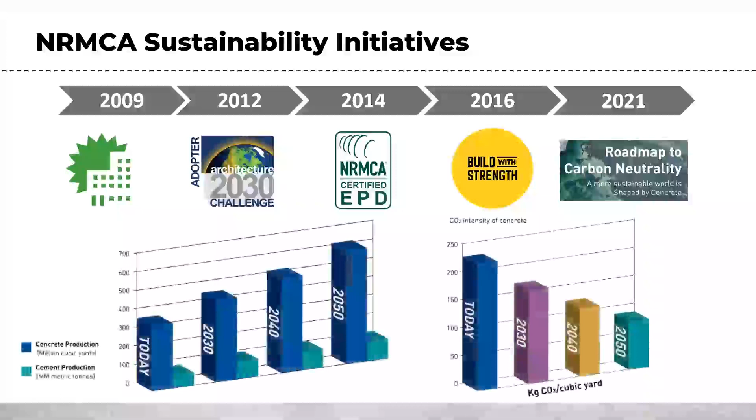And from that report, this is a good visual to identify concrete production in terms of volume and the anticipated projected volumes over time. So where we are today, it's interesting to note that the mass migration of people into city centers and metros, and just the need for constant building -- the best plan is always going to be to reuse, repurpose, that type of thing. But inadvertently, we're ultimately always going to be building new things, and concrete volume is projected to increase.

Same with cement production, but we're hoping to reduce the carbon intensity of concrete over time. So that's that right graphic you see there, today versus 2030, 2040, and 2050, and so on and so forth. All that put together, with our LCA report, from 2014 to 2021, we did record a measurable decrease in embodied carbon for our industry of about 21%. And we're about to launch the next iteration of that report here in the coming year.

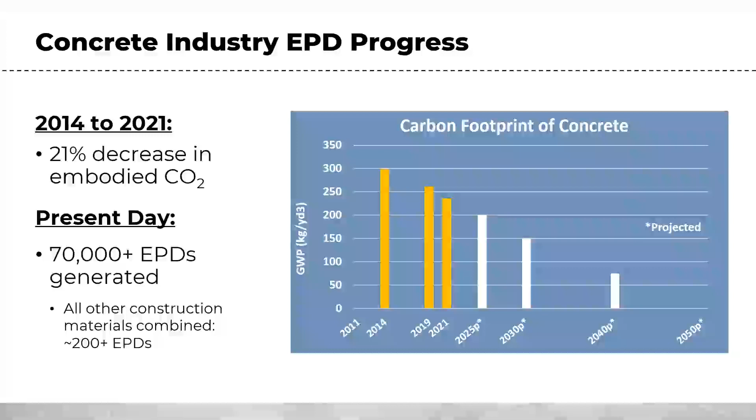So we'll see that even drop further. Present day, our industry has well over 70,000 EPDs generated - environmental product declarations for concrete specifically. Other materials have a much smaller quantity there. So we've been really making a name for ourselves in that regard.

The benchmark reports, this is just some background information. You may have experience with this. If so, great. If not, you'll definitely be crossing paths with it in the near future. We publish a report, we take in producer data, and we look at what a typical concrete mix looks like in certain regions, and then we also proportion industry-wide EPDs.

So our most current version, the 2021 version 3, has something like 72 industry-wide EPDs, based on different cementitious combinations. But version 4 is coming out here in 2024, and we'll have more industry-wide EPDs, so a broader spectrum of options there.

It will also have more specific regions. We went from in 2021, I think it was 8 regions, to a more spread out, parsed data into smaller regions and even possibly metro-focused regional reports. So this is for your benchmarking and understanding, hey, what are we comparing against for our actual project? So be on the lookout for that as it comes out.

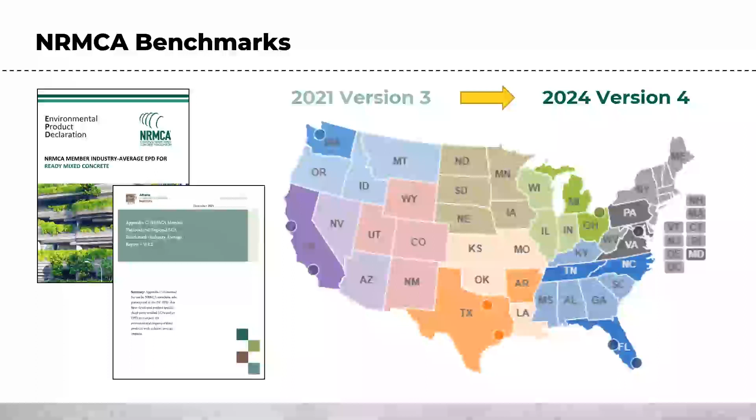Lastly, just some resources here. Check out our website, we'll have all these documents. Top 10 ways to reduce concrete's carbon footprint is a great strategy presentation and educational guide. We have our guide spec as well that highlights the transition to a performance-based specification. These are all going to help you on this journey.

And really, the last thing I want to highlight before handing it off to Luke is just a quick touch point on an important piece of information for setting the stage. Where does the carbon come from when we talk about concrete? Concrete is an agglomeration of many different materials and ingredients, right? It's like a cake - there's not just flour, there's water, there's sugar, there's all types of things. And with concrete, it's just the same.

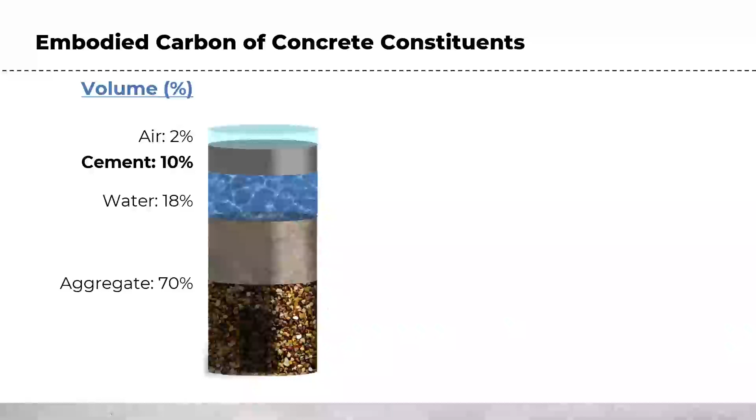And here on the left, you see a breakdown of volume in terms of aggregates making 70%, water and cement only 10%. But when you look at the actual carbon impact of each individual ingredient - and this is for a standard roughly 4,000 PSI mix with no SCMs - you see that cement, although being 10% of the volume, is around 80 to 90% of the actual carbon impact. So that's just a good important piece of information to highlight where we're dividing and focusing our efforts, and something our presenters here will also touch on.

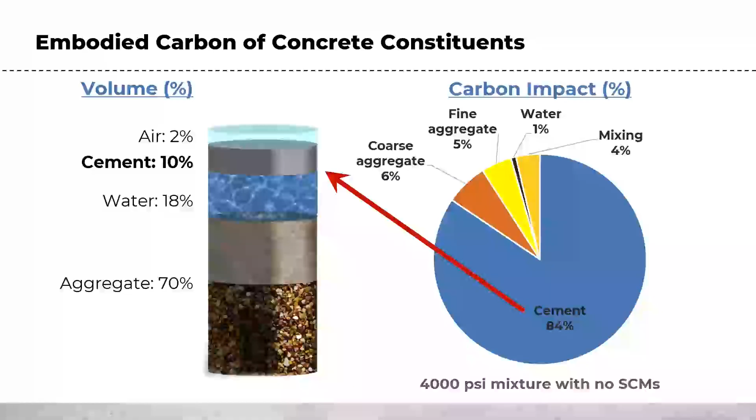So I'll hand it off to you, Luke, and we'll contribute from there. Great, thanks so much, Brandon. Yeah, super excited to be here with Brandon and Dave to talk about a topic that's near and dear to my heart, low carbon concrete.

Yeah, so my name's Luke Lombardi. My background is in structural engineering, and I'm now a sustainability consultant with Buro Happold, and I sit in Los Angeles. And I'm going to start here just talking about why are we here, sharing my experience of what is motivating people.

And personally, I got into this through SE 2050, a program that is engaging structural engineers to own their role in global greenhouse gas emissions. And I'm sure many on this call are familiar with other similar programs, like AIA 2030. Even mechanical engineers have their own decade now, and there's been a ton of great momentum around embodied carbon. Through this, we're starting to see more and more companies also form commitments like science-based targets initiatives. As more people track and measure embodied carbon, or even just scope 3, or the purchased goods carbon, it's becoming more and more apparent just how important a role it plays in industry decarbonization.

And another major driver - I'm sure people are starting to feel maybe a little bit of the heat or pressure to pick up this topic - is all around policy, right? There have been a number of buy clean policies that have come into effect in recent years at the state level. If you want to learn more about that, Carbon Leadership Forum has a great map that you can track those. And shout out to Dave, who's been doing a bunch of really great advocacy work in the Pacific Northwest, as well as we're starting to see both local and state level whole building LCA requirements. Thinking about it, Vancouver and Toronto have both passed requirements for whole building LCA.

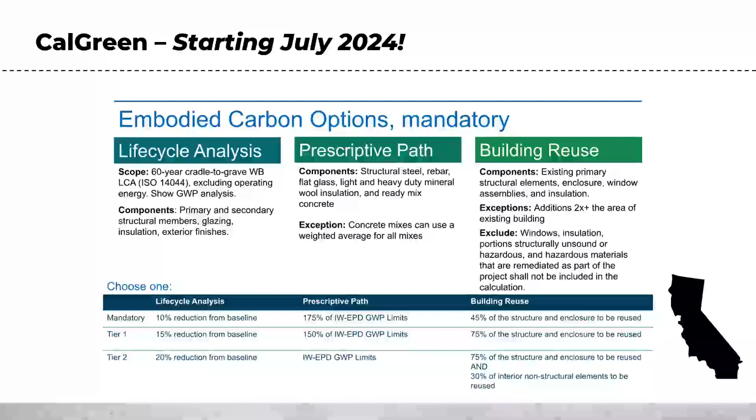But before I go any further, if there's one thing I want you to take away from this webinar, it's that this topic is all about collaboration. It can be very overwhelming. There's a ton of rabbit holes we could go down, and like Brandon said, this could be an all-day workshop, but you are not alone in this. One of the empowering things is really just being able to have the curiosity and humility to ask questions.

I don't have to know everything about mixes, like set time for concrete or pumpability, because I have people like Dave who you can reach out to. So it's very much a team effort, and I know there's going to be a ton of information today. Hope you can go back to this for reference, but I really want to empower everyone to use this as a launching pad to have more conversations, and not be overwhelmed by what can feel like a large new topic.

So diving right into it, people may have a wide range of experience doing LCA, but at the highest level it's relatively simple. We're tracking our material quantities, and it's very important to have tight, good numbers. All of this is contingent on having good data, and that's one reason it's really important to engage folks like structural engineers when thinking about structural embodied carbon, to get building quantity materials, and then we're just multiplying by what Brandon was talking about with the EPDs, like the global warming potential factor.

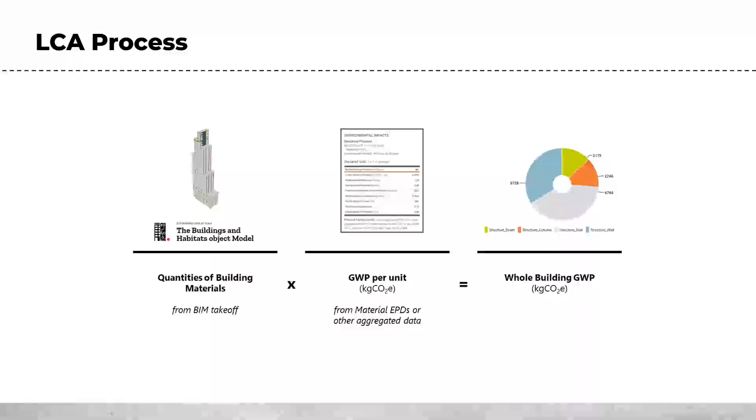So if we have a cubic yard of concrete, that's going to have on average a certain intensity from the manufacturing process primarily, but also transportation, where that aggregate's coming from, where the energy is coming from. All of these things distill down into one number, which is a GWP number. And then we take in aggregate all of those materials for the building, and that's how we get our life cycle assessment.

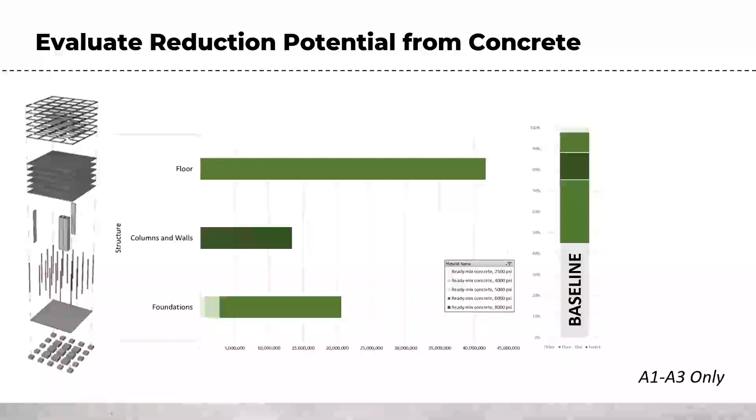But if we know the proportion of the overall contribution, then we can have some sense of what percentages we're playing with, right? So if we can reduce 10% of something that is 50% of the project, we have a 5% overall reduction, right? And that's important when we're thinking about our overall goals.

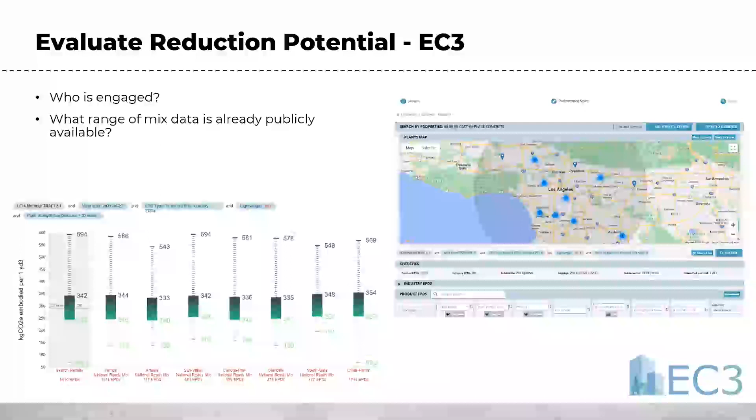And as we get this baseline set up, I think it's really important to start that collaboration process, right? I'm going to keep reinforcing that, but there are a lot of free, easily accessible tools at our disposal now. EC3, something I use pretty much every single day. There's a very nifty new feature that just came out, I think recently, where you can develop a project, and now when you search, you can set a radius within your project and even see the different manufacturers, ready-mix suppliers in the region, and see what data is available to make those informed decisions.

So going back to the project example, we can look at our floor or we can look at our foundation. We can search by that strength, and we can also lay out some other design criteria. Very important, I will also say that this all comes with some asterisks, right? The data that is available in EC3 may be somewhat skewed based on maybe some optimism bias.

It doesn't search by application. So if I search for 5,000 PSI concrete, it doesn't separate mixes that have been applied for floors or foundations or even sidewalks, right? But it can give me a sense of what is the range of impact that I can expect given mixes that are even specific to my region and my regional ready mix suppliers.

And I should also take one step back and just say that baseline, looping back to Brandon's initial comment, that baseline is set by those NRMCA industry averages. So what is a typical strength that I'm using for my project? Very excited for the next iteration of that, Brandon, and more regionally specific averages.

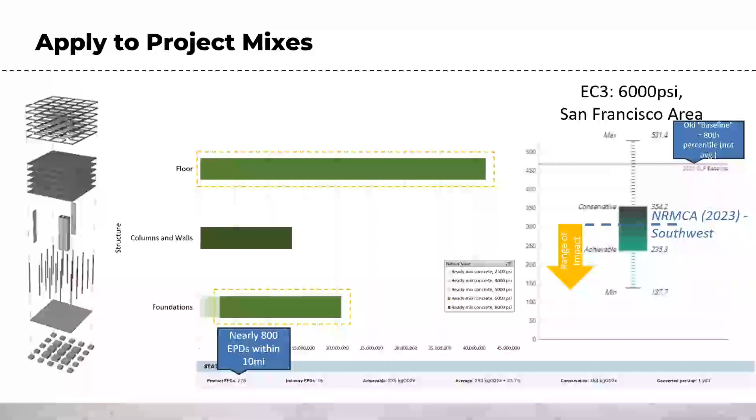But in our case, this is where we start the conversation. And we're particularly lucky here in California, but also places like New York, very rich in EPD and lots of data. It sort of depends where you are regionally, but EC3 is a great tool to just understand what ready-mix suppliers are already providing EPDs. Not that you shouldn't engage and try and get more ready-mix suppliers, or ready-mix suppliers whose EPDs are not on EC3, but it tells you which parties you can start to have that conversation with.

And as the design progresses, you can start to apply this to your goals of the project too, right? Like, are we trying to meet CalGreen or are we trying to meet LEED? A 10% reduction is sort of something that's been somewhat standardized by LEED, for better or for worse. But we can look at where can we have the biggest influence. And you'll see something that's common is floors are almost always the biggest proportion of our material, right?

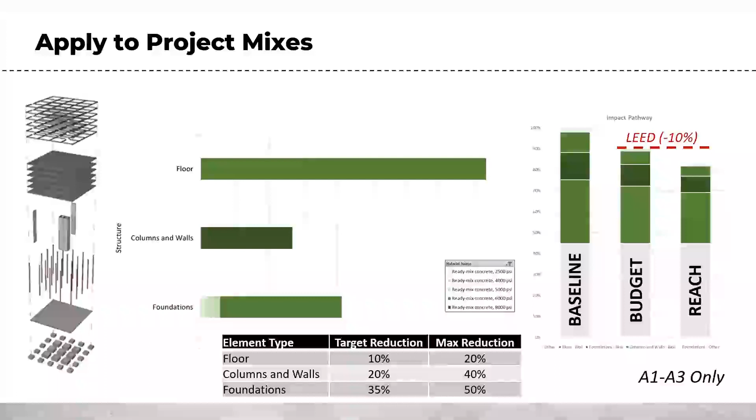And so that's something where we can really try to dial in both the design, but also see what we can do in mix design, because that's the biggest portion. However, there may be places where we can ramp up greater GWP reduction because of other design and construction considerations, right? Like a foundation might be a place where we can expect more reduction because there aren't the same schedule requirements or finishing requirements. The design strength isn't going to see the design load for much longer. Things like that, where we can have this conversation as a design team to see how we can optimize.

And that's the key piece, right? One of the biggest things, the first question I ask when I get pulled onto a project is, is there a general contractor engaged? And I try to start that conversation because they're the ones that probably have the biggest influence, right? Like they're the ones purchasing, they have the connections with the supply chain.

I try to write a little introductory email and talk about the goals of the client, goals of the project, and set up design charrettes, and just get an understanding of what ready-mix suppliers are in the area.

If I can have a conversation with mix suppliers specifically, we can talk about what is your SCM supply chain, what is the availability, is it seasonal, do you get Portland limestone cement. So the checklist of things we know can reduce embodied carbon in concrete, we can talk through those and make an assessment of what are the risks and what contingencies we need to meet our sustainability goals. Do we need a different mix design in the winter because it's cold?

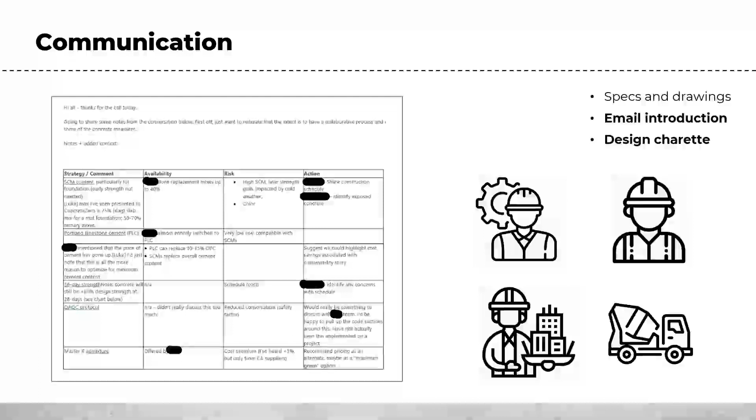Can we talk about loosening up a traditional 28-day break strength for certain elements? And where we formalize this - ideally you have a conversation and you can solidify some of this in your project documents, your specifications, your drawings, and there will be more discussion around performance-based specs in the rest of the presentation. This is where hopefully that communication gets solidified and becomes part of the requirements of the project.

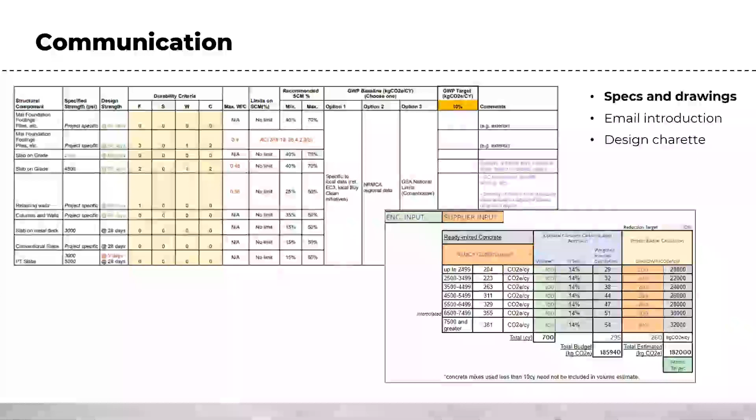Again, Brandon and Dave will talk more around the concrete GWP budget approach and all that, but just to say this is something that's key for effectiveness on the project.

And all of this discussion, all this collaboration, is really steering the industry towards better practice. It's how can we as structural engineers specify what we need and not restrict the design, for better optimization of global warming potential or other characteristics that are important. And I think there's a lot of mutually beneficial aspects of this.

Something we've been working on transitioning here in California is just getting structural engineers to make sure they write in their specs that they can allow Portland limestone cement. There's good data and a shift in the industry with that. And I think there will only be more innovations and other aspects that we will need to continue to collaborate on, and move faster, because the timeline we need to make changes for climate is relatively short.

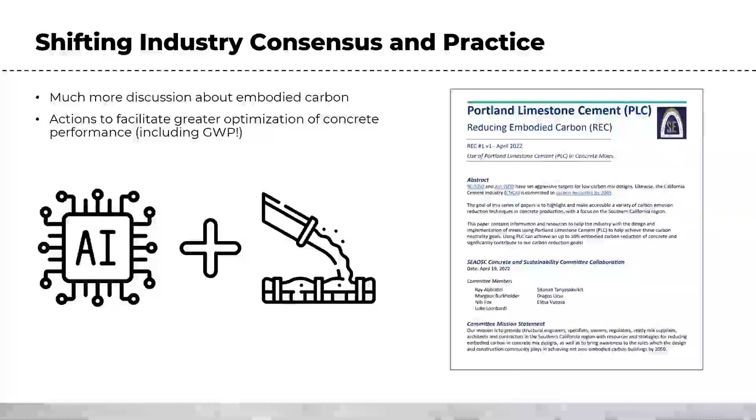I'm probably over my time. Like I said, we have a lot to cover, but just in closing, I want to touch on, because it's always something that comes up, cost.

There is industry research as well as anecdotal experience, and again I encourage you all to talk to folks who are in the field actually doing this. But there seems to be great potential, in the range of 15 to 30% reduction in concrete, possible without necessarily impacting cost or schedule or those things. And I'm sure Dave can talk more about that.

I also flag that right now there's a lot of industry research and it continues to be dynamic. Things will continue to change, but I expect we'll have to meet those baselines - might change in the future. It may change from the building itself, which is fairly common practice now, to more standardized intensity limits, and we can imagine that will continue to get more and more stringent as the decade moves on.

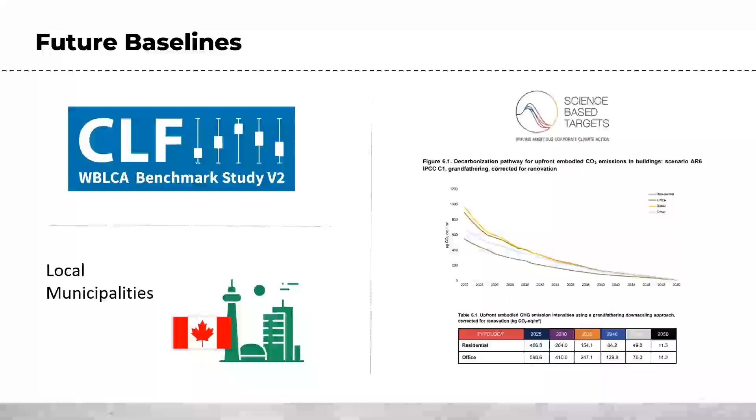Dave, I'll hand it off to you. That was fast.

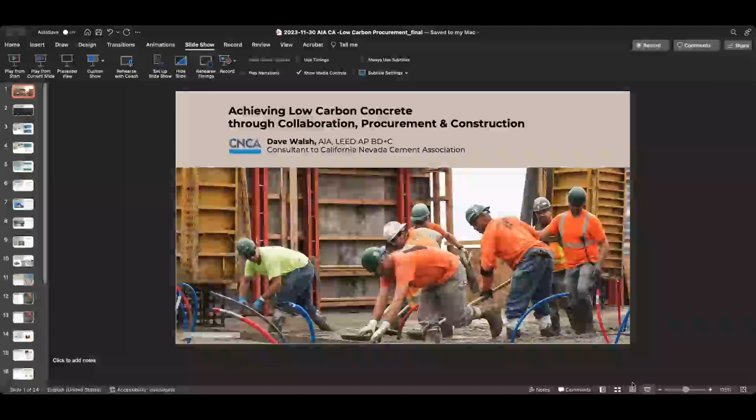All right, so again, glad to be here. Luke, thank you for that presentation. My name is Dave Walsh. I'm an architect and worked many years in the design field, and then most recently was the Director of Sustainability at Sellen Construction in Seattle, where I'm based.

So today I'm going to talk a bit about how contractors and design teams can collaborate, a little bit about procurement, but also what can be done before and during construction to reach the carbon reduction goals on projects. So I'm going to start with those very early decisions in a project that can put projects on the pathway to maximize their carbon reductions, but also have an impact on constructability.

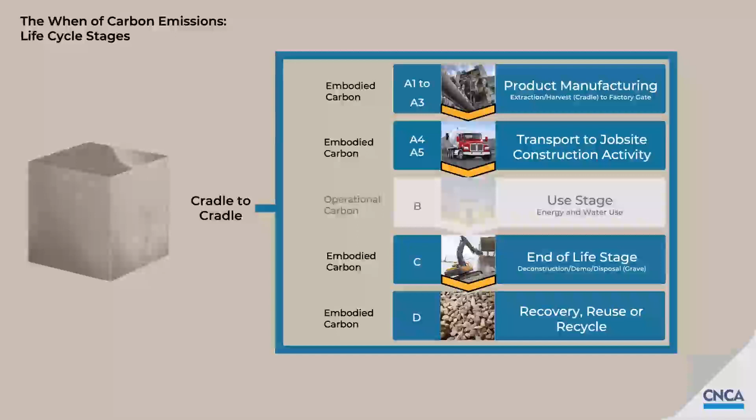So starting with the when of carbon, as many folks probably know, the International Standards Organization has divided lifetime carbon into various life cycle phases, A through D. This is the so-called cradle to cradle. A lot of the focus and conversation is around upfront carbon, so that's life cycle A.

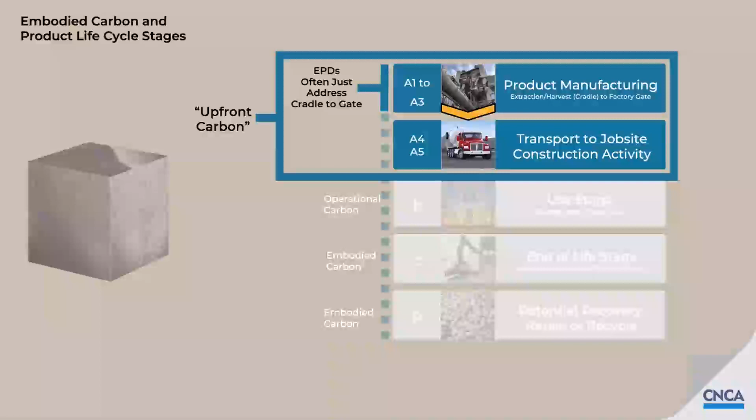And within that, a lot of the focus is on EPDs, which not always, but most frequently cover just A1 to A3, which is the so-called cradle to the factory gate. So you might think that, since today we're talking about concrete as a material and embodied carbon, that A1 to A3 is really all the story. But I would say that even before anything is manufactured or brought to the job site or placed in a building, there are very important design decisions which have a lifetime impact on carbon.

So I'm thinking about things like those program decisions—what is the owner asking in terms of flexibility requirements? And how does the need for flexibility drive things like the bay sizing, which drives span lengths, and all of that rolls up into material quantities and embodied carbon.

Obviously, your engineering choices matter: what kind of structural system, how is the lateral system organized, are there efficient load paths within the building or a lot of transfer slabs? All of those things too can have significant impacts on embodied carbon.

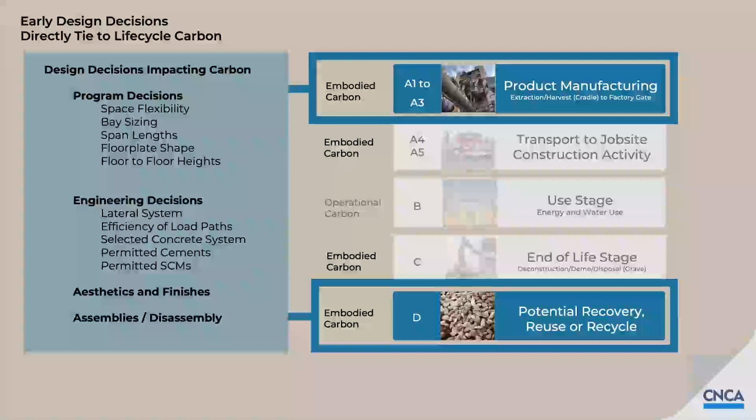And then towards the end of the project, how things go together, but more importantly, how things come apart in the end, ties directly to that last life cycle phase D. Because if things don't really come apart in a financially feasible way, they're really not going to be recovered, reused, and recycled to reduce the embodied carbon of that next project.

So once you've decided that concrete is the best fit for a given project, the next decision is what kind of concrete system—whether flat slab, slab on metal deck, or maybe a post-tension system. Each one of those systems has a direct carbon and constructability impact.

Each different system will have differing relative quantities of materials, and with that, differing relative quantities of embodied carbon. Your contractor might be thinking, with a given system, can I do a strategic trade-off?

Can I intentionally use a higher strength concrete, which may have more global warming potential lower down in the building, so that as I rise up, say with the columns, I can go to a leaner mix and have an overall reduction in embodied carbon.

Your contractor will also be focused on those tricky areas—where does, say, rebar congestion necessitate a highly flowable concrete like self-consolidating concrete, which has both a carbon and price premium over conventional concrete? And then, as always, constructability issues.

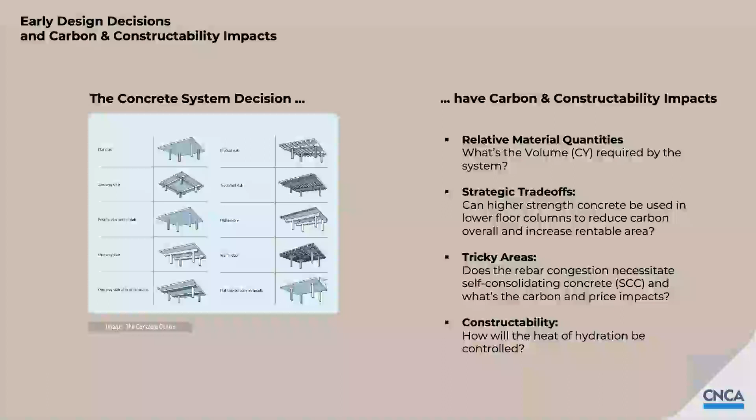Your contractor will be focused on things like the heat of hydration and how the various concrete systems affect that constructability need.

So the type of concrete system—some systems are more schedule sensitive than others. And I'm thinking in particular about post-tension decks. Those have a very tight schedule need.

They have a need to have a tight pour cycle so that it will support the overall critical path of the project. And so when you have to support the pour cycle, you need to reach an initial strength fairly quickly, sometimes between 1 and 3 days, to support that overall schedule.

And so your contractor is wondering, what is that—I'll call it the Goldilocks mix—the mix that meets that initial strength so you can stress your tendons, but doesn't have excess carbon emissions.

Also, your contractor might be thinking about the other elements in your project, the other applications, maybe a mat slab or a foundation that will receive the live load later on, and maybe the maturity date to reach that full design strength can be extended beyond the traditional 28 days.

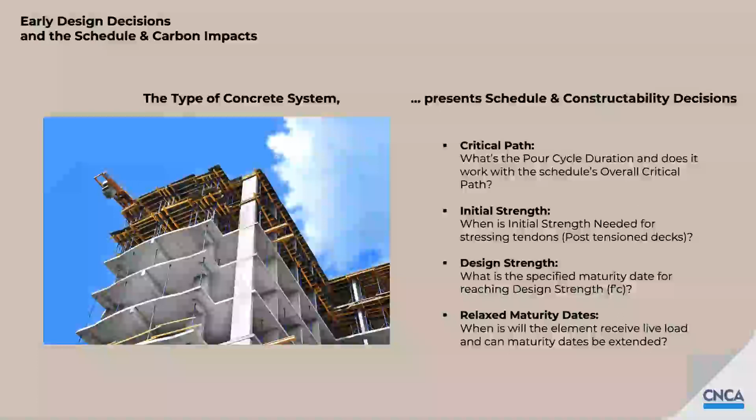So column layout, span, and lateral systems all contribute to embodied carbon. I think that some of these decisions are obviously not discretionary decisions. Sometimes your site is what it is, or your program demands those long spans.

But what I would suggest is that if you do have a project that has some flexibility in maybe the aspect ratio of your floor plate, or the spans don't always need to be those long spans, these are great opportunities to have material savings, and with that, have a design impact on reducing the embodied carbon.

So things that you might not immediately associate with greenhouse gases, like aesthetic decisions, can play a role. The desire to have a light appearing concrete, or the desire to have polished concrete, can influence your mix choice.

For example, if you wanted a light appearing concrete, is your contractor going to have to source white cement from perhaps the other side of North America and incur those transportation emissions? Or would it be acceptable to use a supplementary cementitious material like slag that has the advantage of having a whiter appearing concrete after it's cured?

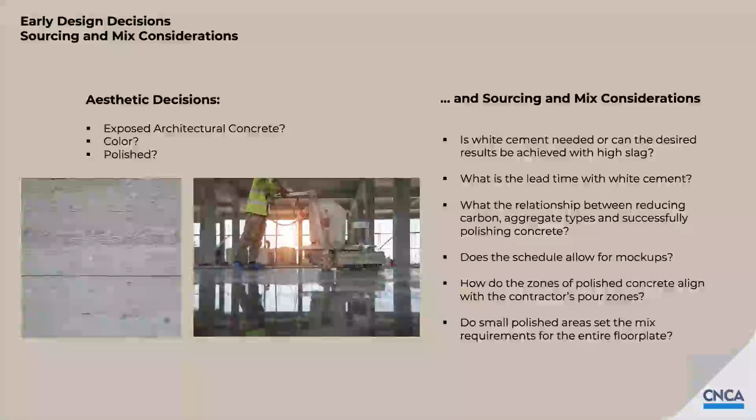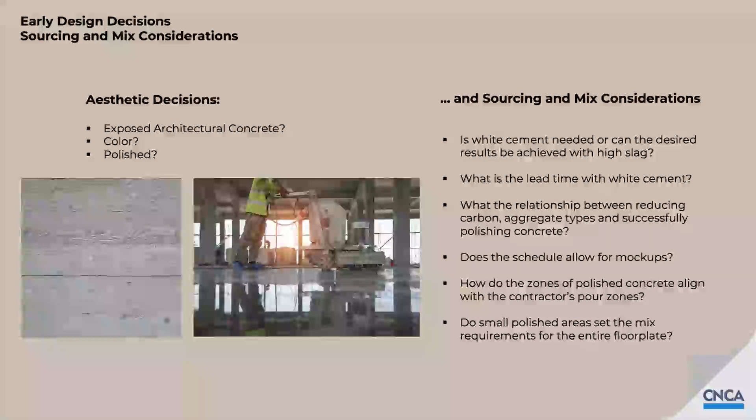So what can be in the specifications that enable your contractor the tools to reduce embodied carbon? When I think about specifications, I think that they really need to do basically three things. First, they need to be performance-oriented and not prescriptive.

So tell me what you want, not the recipe on how to get there. This is very important for design teams, because if you're overly specific, if you frankly give exactly the recipe, how much cement, how much this, how much that, and something doesn't work out, your contractor might say, hey, we did exactly what you told us and it didn't work out.

And maybe that's not our issue. The second thing that specs need to do is they need to allow for multiple options with the ingredients. So multiple types of blended cements, multiple types of supplementary cementitious materials, multiple options with both aggregates and admixtures.

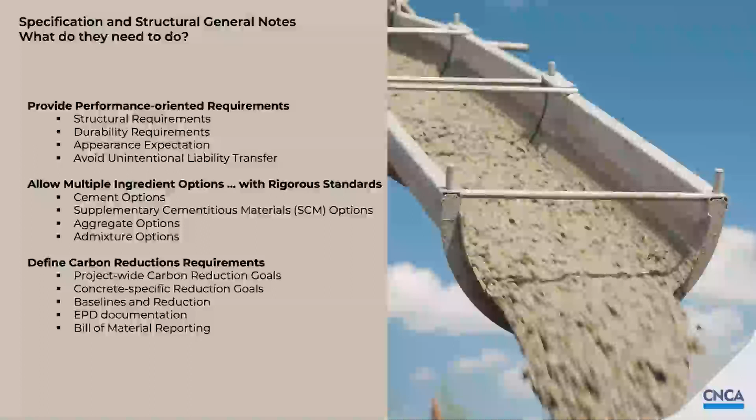And then lastly, the specs need to be very clear about what are the carbon reduction requirements, not just generally maximize reductions as much as possible, but very specific and quantifiable. Be clear that do you meet these reduction goals with a portfolio of multiple materials over the entire project, or is it something specific to concrete? And then when you set your reduction goals, be clear about what kind of baseline you're looking for, what kind of documentation in terms of EPDs or bill of material reporting.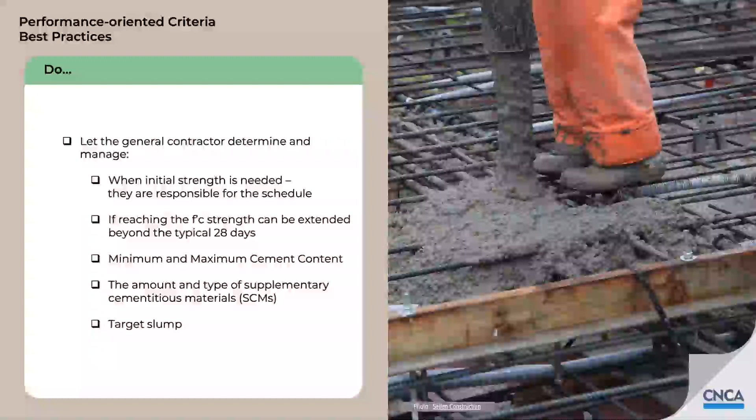So a few do's in terms of performance-oriented criteria. There's some things that you should let your general contractor determine and manage. They are responsible for the schedule, so they need to be the ones determining when that initial strength is needed to support their schedule. But on the other hand, they're the ones in the best position to say, hey, for this application, maybe we can extend reaching that design strength, that F'(C), beyond the traditional 28 days.

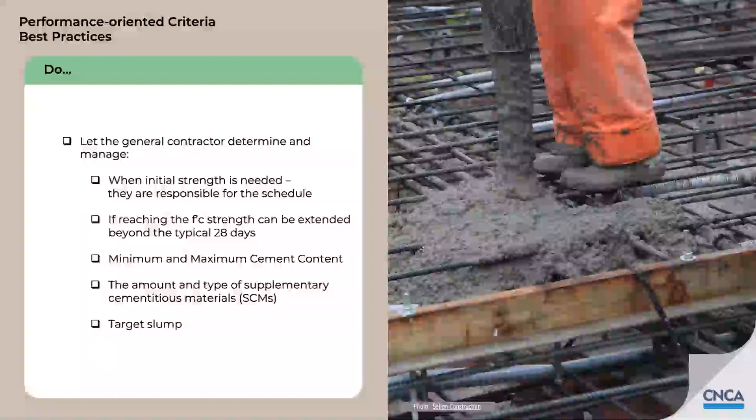Your design or your contractor team should also be the ones determining the min and the max of the cement content, the type of supplementary cementitious material, and constructability characteristics such as slump.

A few don'ts: obviously don't go back into the archives and copy a prescriptive oriented specification into a new project. Don't limit the type of allowable cement to just the traditional type 2 and type 5. And also don't require a certain minimum percentage of SCM replacement. I'll talk about this a little bit later, but that's really the wrong way to go about that.

Also, importantly, don't peg a specific value for the water cementitious ratio. This is important, but you can let the requirements of ACI 318 be your technical guardrails to give you the quality, and also avoid a situation where if you were to peg that specific water cementitious value, it could take some good solutions off the table that would otherwise meet the requirements of the project.

So real briefly, I'll just talk about blended cements and what they are, at a very high level. When you're making cement, limestone goes into one end of the kiln, and at very high temperatures, there's a chemical reaction called calcination. This is the moment that most of the CO2 related to cement is released. And so with blended cements like Portland limestone cement, also called type 1L, about 10 to 15% by mass does not go through the kiln, and so it doesn't have that chemical reaction.

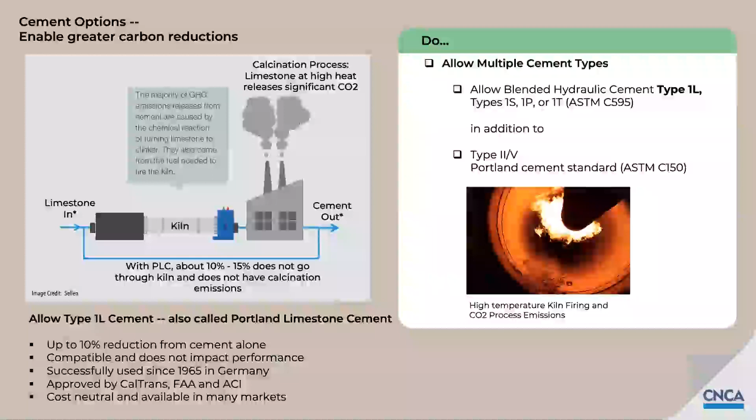So getting back to the topic of why you should not specify a minimum percent by mass of SCMs or supplementary cementitious materials. You can see in these two examples, they're both 5,000 PSI mixes. One reaches it very quickly, the other takes a little bit longer. But by mass, they both have 25% supplementary cementitious materials. But if you look at the actual emissions, the kilograms of CO2 emitted per cubic meter, there's quite a difference.

So the right way to express a reduction target is to pick a baseline and then say that there's a reduction by a percent below that baseline, not require a certain percentage of SCMs by mass in a given mix.

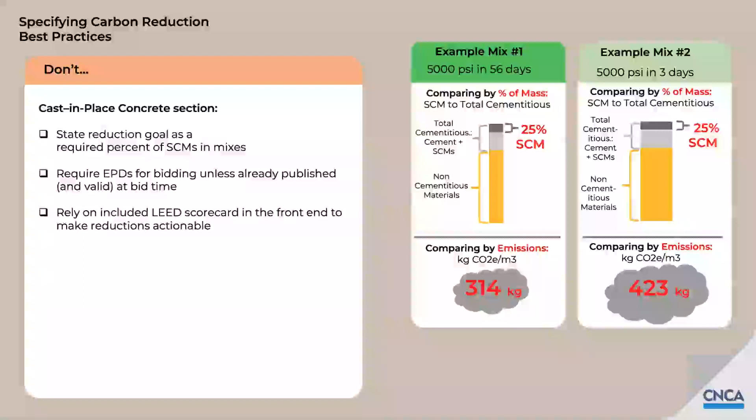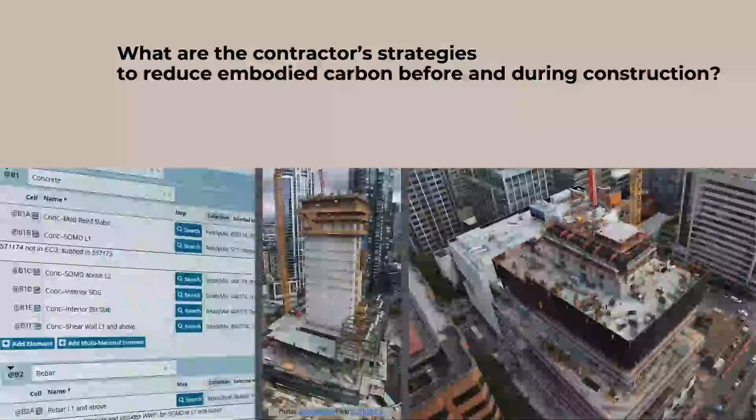So lastly, I'm going to touch on a few things your contractor can be doing in pre-construction and construction. One great thing, and Luke mentioned the importance of collaboration, I really couldn't agree more, is that during design development, if you have your contracting team and your supplier on board, have an embodied carbon concrete workshop.

Include the architect, structural engineer, general contractor, concrete contractor, and concrete supplier if you have them. This is a great time to talk about the relative quantities of each application, what the general contractor is seeing in terms of typical business-as-usual reductions, what schedule needs there are, whether there's a tight pour cycle, and frankly, what makes people nervous, and what strategies address these concerns. From this, come up with a short list of targets and reductions for each application.

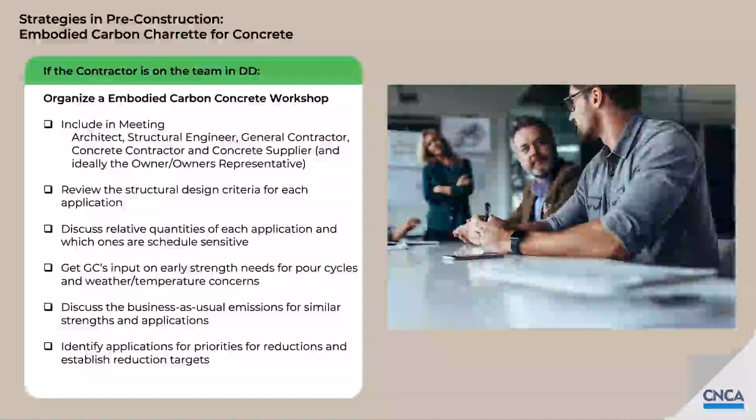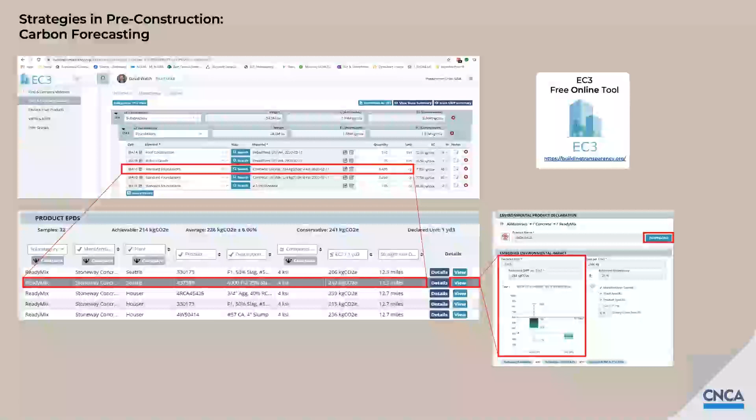I see that contractors, during the design process, need to expand their role from just doing cost estimates and building a cost model to building a carbon model. They need to become a carbon forecaster, maybe using a tool like EC3 that Luke mentioned, or some other tool. This is important because a contractor needs to understand where the carbon is in the project and what the big movers are, so when they're doing the buyout and selecting a successful bidder, they're not just paying attention to carbon for one material, but all the areas that are significant in the project.

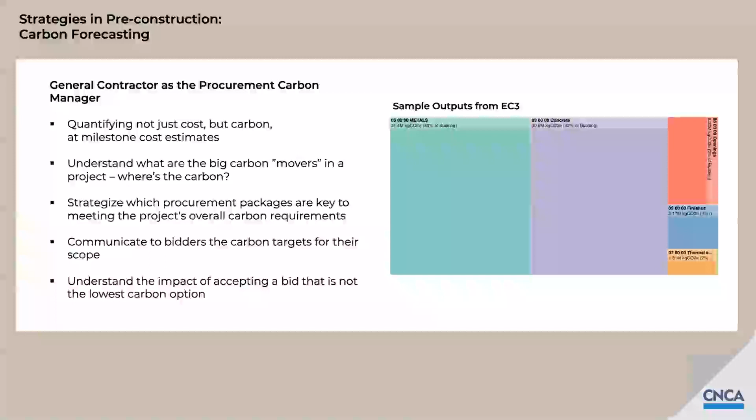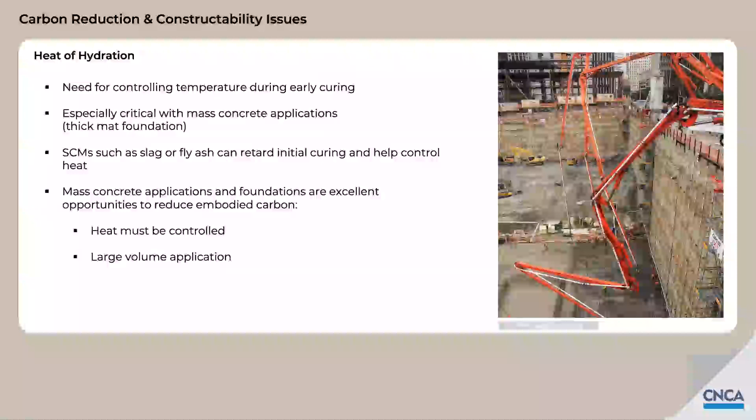Constructability is important for everybody, but some constructability issues actually align with embodied carbon reductions. Addressing the heat of hydration is one of them. You need to look at areas with large volumes of concrete, which generate a lot of heat when curing. Using things like slag or fly ash can retard that heat and the curing, but also help you use less cement and have less GHG in those mixes.

Reaching early strength is kind of the opposite challenge. Thinking about tricky applications like post-tension concrete slabs, finding a mix that supports stressing the tendons early but doesn't blow your embodied carbon budget. Things like colder weather can frustrate these issues, and sometimes using maturity meters that measure the heat of curing concrete, which tells you the strength, can help fine-tune the most carbon-efficient mix for the season.

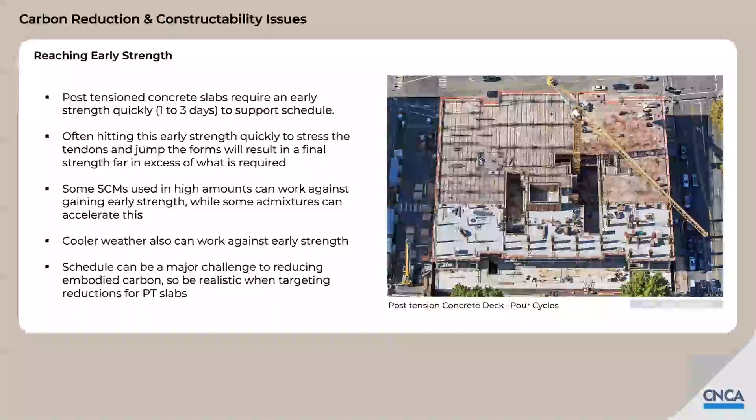How concrete is placed, whether it's pumped a long distance or shotcrete, will determine not only the ingredients that go into the mix but also the carbon intensity. So be aware that different methods of placement can impact carbon intensity.

Lastly, finishability, always an important issue for everybody on the team, especially the contractor. Some desired characteristics may tip the scale toward one supplementary cementitious material; fly ash has the advantage of a creamier mix with improved workability, while slag, as I mentioned, has the advantage of curing more white.

As always, I want to stress again that what happens in the lab with a test cylinder is not what happens at the job site. So if you're breaking new ground, trying new mixes, being aggressive, please make time for in-situ mock-ups to make sure it addresses all of your project needs.

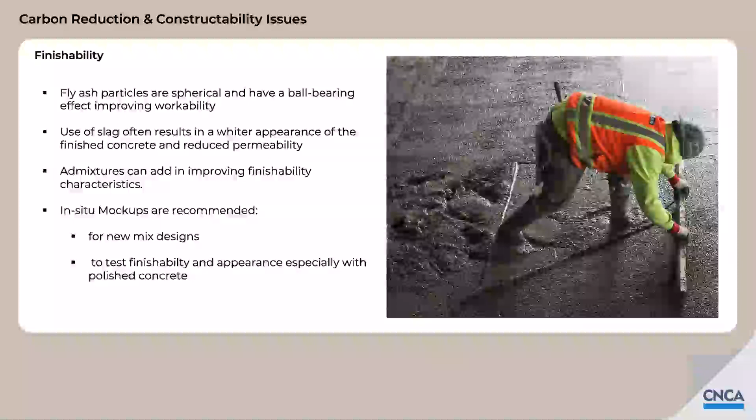Perfect, thank you, Dave. I'll second that collaboration discussion we're having, and trying things that may be a little new or different for certain contractors or projects. Early-age collaboration is always where you allot yourself time to do the mock-ups, do the trials, collect the data, and get comfortable with it. If you're showing up the day of bid wanting to procure low-carbon concrete, there are things off the shelf, but your best-case scenario is always allotting yourself that time to get it done.

So next up here, I just wanted to touch on a few things. I wanted to give an example.

I think I alluded to at the beginning here, we have a new carbon tool that does help in this process. I find that there is a lot of ambiguity in exactly how to ask for and receive this infamous low carbon concrete, LCC. How do you get this?

The simplest way to look at it is to set the stage by allowing producers to put forth their specific low carbon solutions, because not every producer is the same. Not every region has the same materials. So it gets very finicky if you're trying to explicitly prescribe use this cement, use this much SCMs, those types of things.

The goal is to set the stage by allowing all these different strategies, if available, to be implemented without any inhibition from the specification. This also allows for flexibility in execution with the contractor in the field, because time of year and schedule considerations are all going to be key. We've all been on projects where as-built conditions almost always differ from the original plan design. This follows that same ethos.

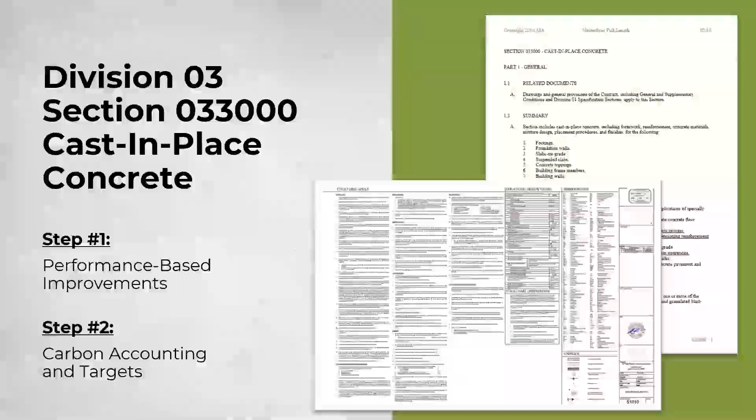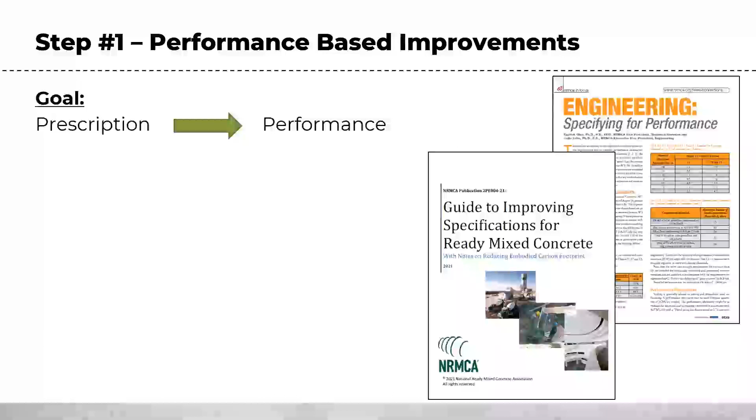On step one, prescription to performance, with these performance-based improvements, the goal is simple: to make that transition. Some tools you might consider are shown here. We have our guide specification to ready-mix concrete in master spec format. It shows all the different things pertinent to procuring and installing concrete successfully, while also allowing for these different strategies as they are available.

We also have a guide on specifying performance. So if you're an engineer or working with an engineer, there are other things you can specify that can even override certain exposure class requirements by actually having testable metrics that you adhere to.

But the key overall through this whole process is really adhering very religiously to your exposure classes for ACI 318. For the different conditions that the concrete is exposed to, there's going to be prescriptive criteria to ensure performance. That's the purpose of the code. But we want to make sure these prescriptions are not applied to all concrete and all applications, or carried over from one project to the next.

Being exposed to freezing and thawing in one application, but all of a sudden that same mix is intended to be applied to an interior slab, you don't want those same limits. There's going to be water to cement ratio limits, SCM limits potentially, and strength limits that really force the mix to evolve into something it necessarily doesn't need to be.

So there are other things to consider. If you are trying to control shrinkage, look at not putting in water to cement ratio limits for that, but actually specifying the shrinkage percentage, or deflection and stiffness, looking at the MOE of the composite mix, and not just specifying higher strength and lower water to cement ratio, thinking that's going to get you the modulus of elasticity you need. There's a lot of different things you can do, and it's a whole other presentation as well.

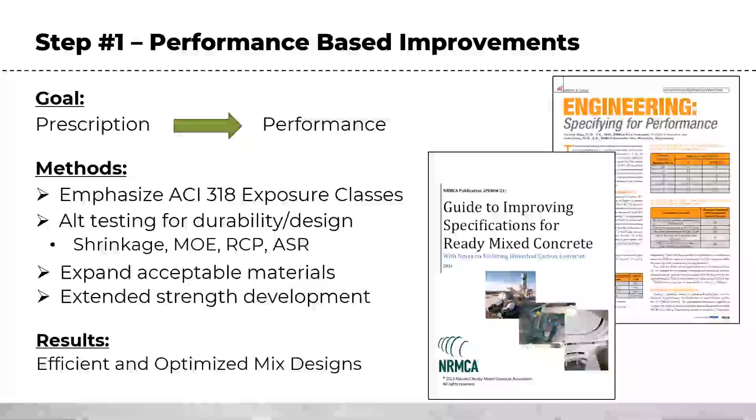As I mentioned, the one thing about performance-based specs is that they allow for sustainable mix designs and processes, but they don't require it. That's kind of the point of performance-based specs, is that they allow that flexibility and testable means. So really, at the end of the day, in regards to sustainability, if you don't ask for sustainability, you're not going to get it. A clean performance-based spec opens the door for a lot of different strategies, but it doesn't force the hand of certain materials and those types of things.

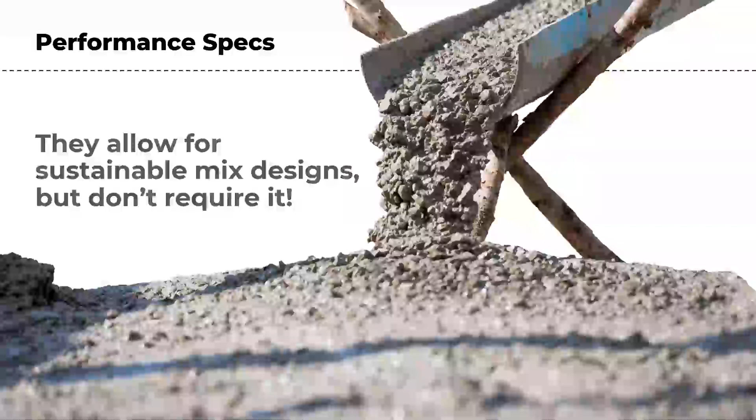So this is where carbon accounting and targets come into play. Instead of specifying specific strategies, we want to set targets that trigger the use of low carbon ingredients and methodologies. This begins with collecting your environmental product declarations, and builds off the adage that you can't reduce what you don't measure, which I mentioned earlier. Critically, we want to encourage asking for product-specific EPDs when available, but also allowing for industry-wide EPDs, as both can be powerful in establishing and achieving carbon goals.

Our industry-wide EPD is not like other industries where it's an agglomeration of everything, one EPD trying to encompass every single mix. That's not the case. We actually have a matrix of seventy-two industry-wide EPDs, and those cover all different types of cementitious combinations and are much more accurate.

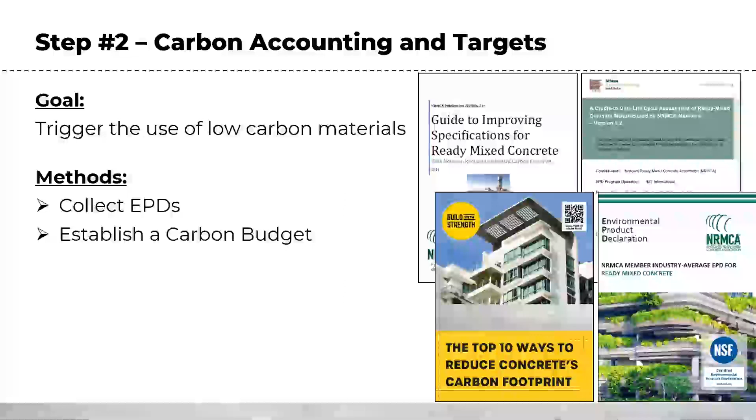And with these EPDs, we can then establish a carbon budget that becomes the guiding mile marker for the entire project as you're trying to transition towards a low carbon project.

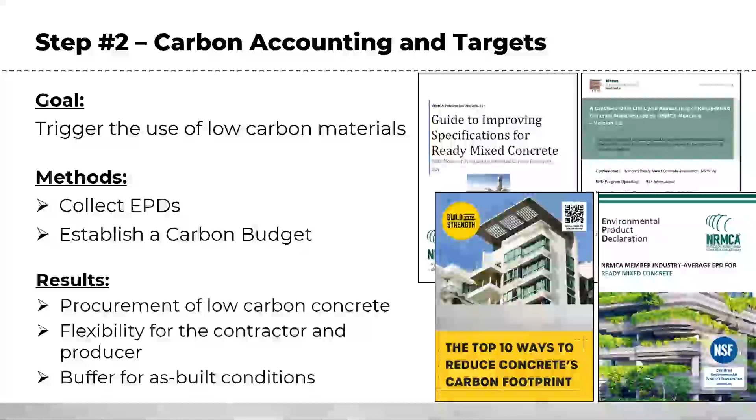When you get to the end of this process, this results in procurement of low carbon concrete, and more importantly, flexibility for the contractor and producer to allow them the time or availability to implement certain strategies that might be more beneficial to the schedule, less on sustainability, but they make up for it in other applications such as foundations, that type of thing. And also a buffer for as-built conditions, since as we all know, there's going to be variability there.

So specification first and foremost: resist the temptation to set carbon footprint limits for individual classes of concrete. There is a use case for this, but in effect it's the same as providing prescriptive limits on materials, and doesn't leave room for the contractor and producers to innovate and meet project performance requirements, including budget and schedule. There are certain use cases where this is viable, particularly if you're really well connected with a producer and contractor, for a mega project for instance, where you can identify what those limits realistically can be. But typically we encourage a carbon budget, and that's going to be your more preferred approach, taking the project as a whole.

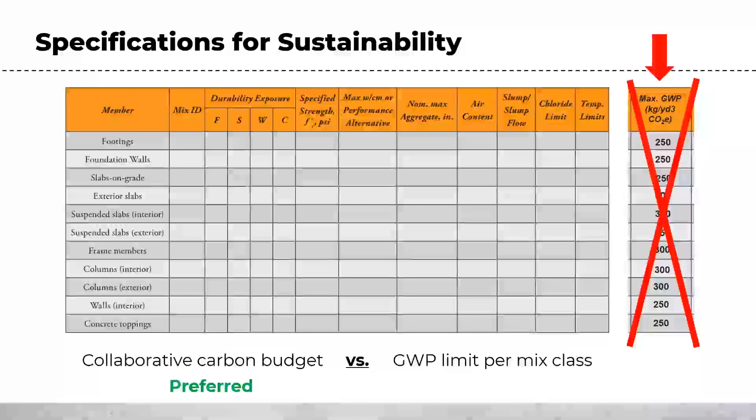The budgetary approach is preferred to a piecemealed approach, largely because it allows the project team to strategize and adjust mixes as needed to fit variations in material availability and schedule demands. Do we need to accelerate certain slabs or certain columns so we can keep the project on schedule? Then we make up for it with much more significant reductions in the foundations or other elements—doing a 50% reduction against the benchmark in the foundations, great. With a prescriptive approach, you might have said, for the foundations we want 30% reduction, and maybe that's all you get. Maybe you can push the limits a little further, but that's really more so means and methods, up to the contractor and producer to delineate.

When you really look at it from that high-level holistic view, both routes—a project budget versus individual limits—can have the same essential output in terms of total GWP. One is doing it prescriptively, and the other is really setting the expectation for the contractor and producer, but allowing them to figure out how to achieve that.

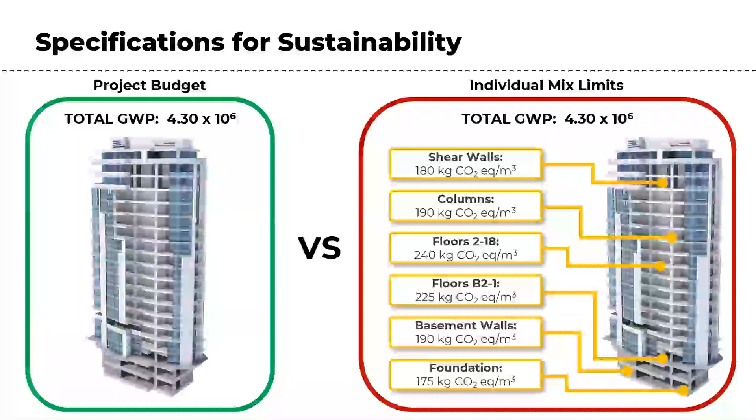So to give an example project, I'm going to run through this here, and we should have enough time.

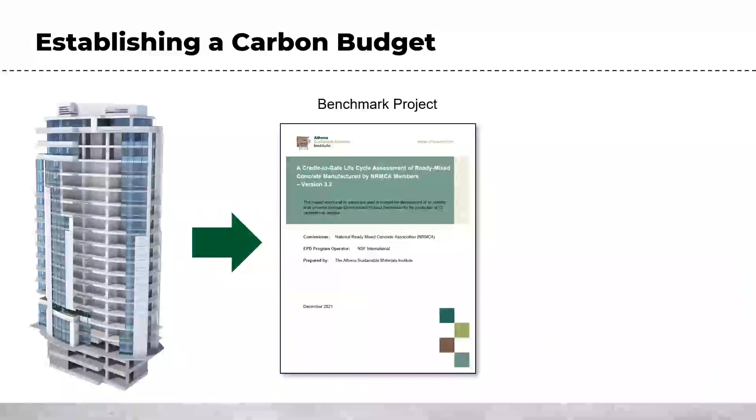As previously discussed, the best approach is to use life cycle assessment. You may not feel like you have sufficient experience in this, but it's relatively simple, and hopefully this will portray that. Step one is always going to be to have a benchmark project, using one of many different benchmarks. You can even look at requirements from municipalities, those types of things. The benchmark project is going to be your baseline, and then you'll compare against a proposed project.

For our example here, we're using NRMCA's Cradle to Gate LCA of Concrete report, various iterations, currently on version 3, as I touched on at the beginning of the presentation, transitioning next year to version 4. So for a certain strength, you'll get an actual typical impact there.

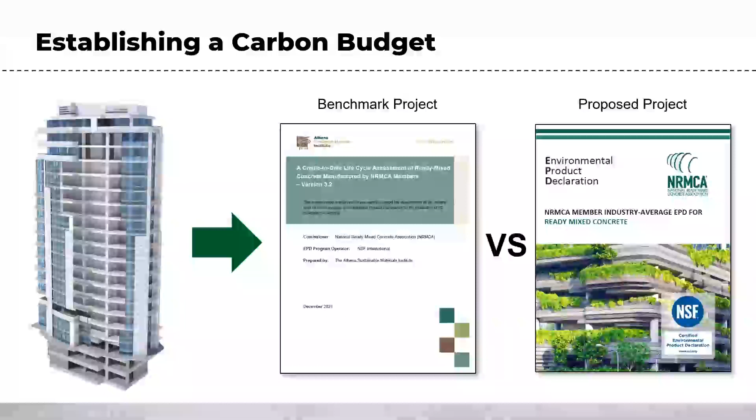In this case, you can use industry-wide EPDs, as mentioned, or product-specific EPDs. If you have them available via EC3 and know how to use that tool and interpret the different applications and strengths, you can get an idea from there, or work with the producer and contractor to get the product-specific EPDs you intend to use.

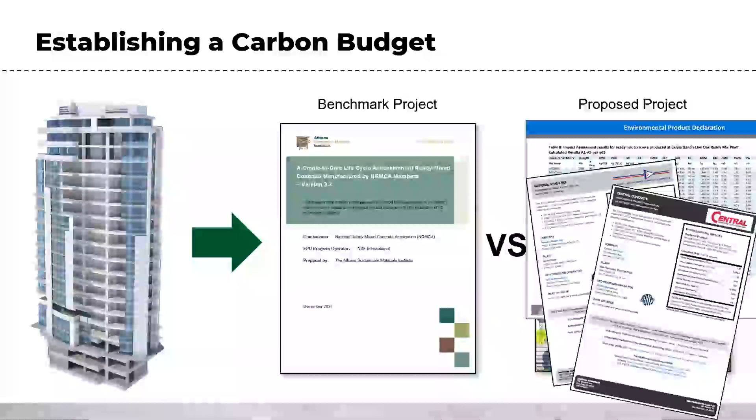Really, going through this whole thing, essentially for each instance, benchmark and proposed, it's simple arithmetic. Once you've identified and tabulated the GWPs for each class of concrete, you're just looking at the volume times the impact, or times the GWP for that mix, to get your impact, and you total the impact for the project. You do that for a baseline, and you do that for the alternative low carbon mixes.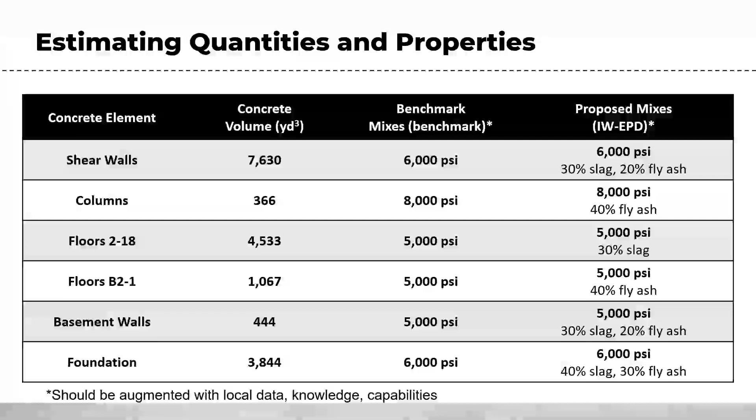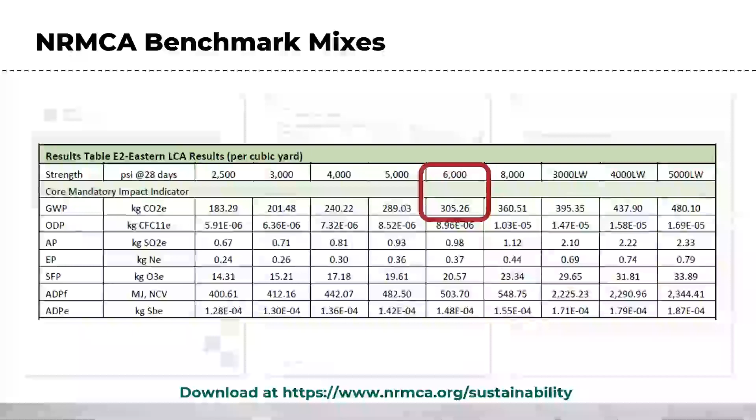On the benchmark side of things, this is the actual report. When you look at it, say it's in Boston, we look at the Eastern benchmark. You identify there 6,000 PSI, there's the GWP - you've got 305 kilograms of CO2 equivalent per cubic yard. That's your benchmark for 6,000 PSI mixes in that region.

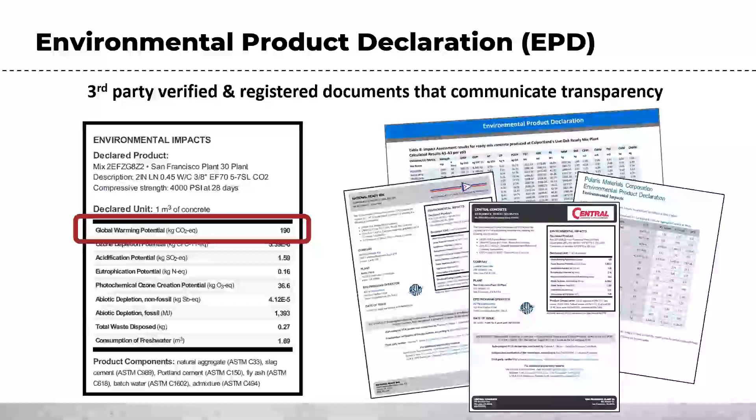Next, you take the environmental product declaration. In this example, looking at a product-specific EPD, you can scroll down. There's a lot of different things there, but the most critical thing we're looking at for this example is the global warming potential. In this case, this is a 4,000 PSI at 28 days, having 190 kilograms of CO2 equivalents. Keep an eye on units - that's something we always want to highlight.

Looking at if you were to use the proposed industry-wide mixes, it's the same general report as the benchmark, but there's a different appendix for the industry-wide data. As I mentioned, there's 72 EPDs for this particular example, looking at say 6,000 PSI. You have the different cementitious combinations - is it 100% cement or with fly ash or slag, and in what proportions.

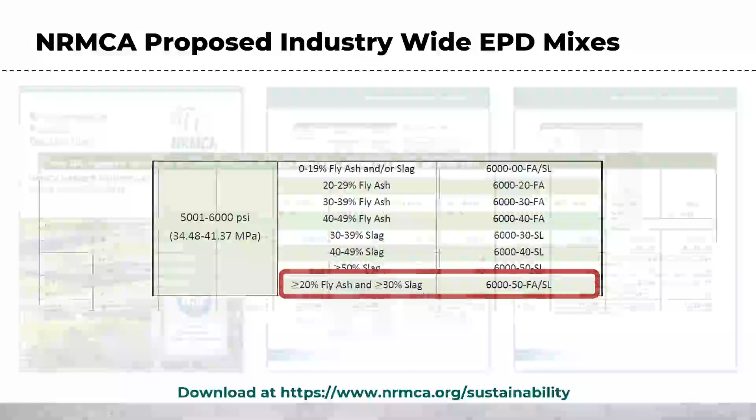You can identify, okay, in this example for say a foundation, or another element like a shear wall, we'll do 20% fly ash, 30% slag, for instance, and that's your mix delineator. Then you can find that mix later in the report and see the impact - for that particular mix, 232 kilograms of CO2 equivalents.

After going through that exercise, you'll have all the different classes of concrete or elements, the volumes, the benchmark impacts for each mix, and the proposed impacts for each mix, whether you got those from the industry-wide data or from actual product-specific EPDs.

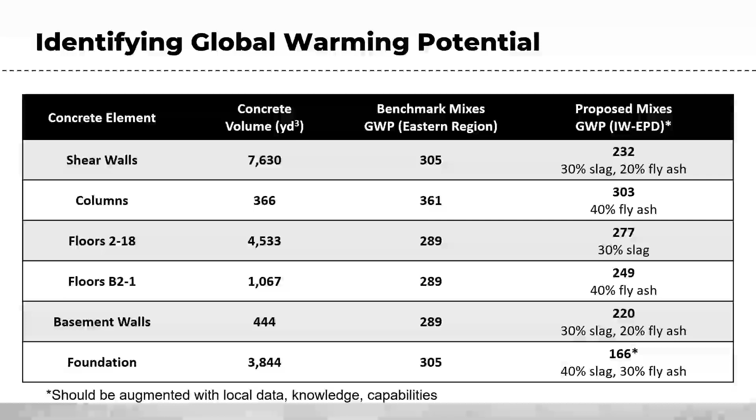One thing I like to note is that the industry-wide data currently only looks at up to 50% SCM replacement. If you're in a region that does 70% replacement for foundations, which is common practice in certain areas, you'd have to augment that with product-specific EPDs, or we can actually calculate that specifically in our tool. The tool itself is a great connectivity resource between NRMCA, who does the benchmarking and industry-wide data, the producer actually producing the mixes or having product-specific EPDs, and the designer, to help navigate that process. It's available on our website.

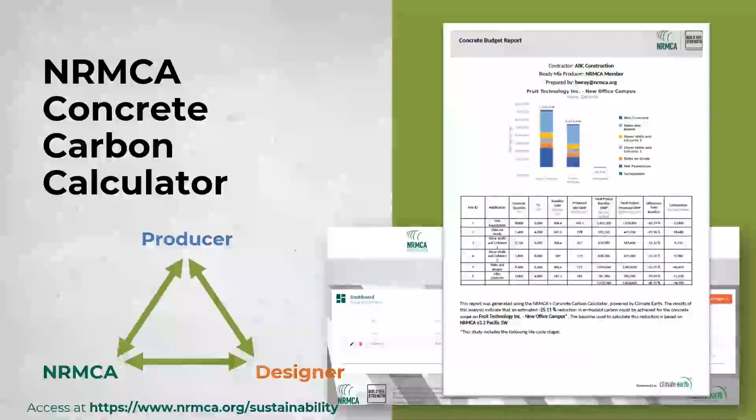It's really just a web-based tool, really interesting, simple, straightforward. The output from that is an actual simple report that itemizes all the different impacts. I won't spend a lot of time on this.

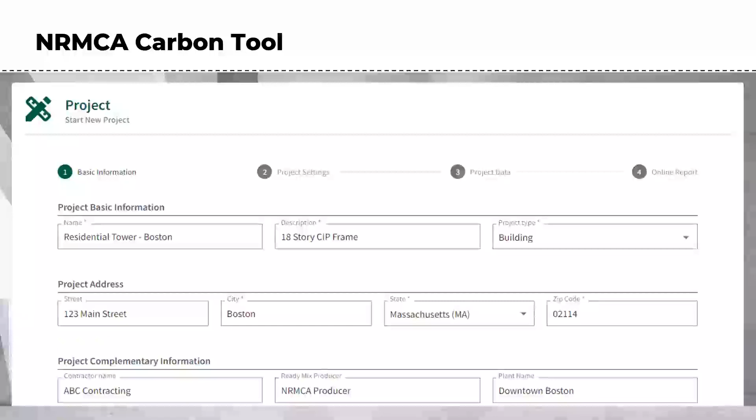It's the generic input variables, typical stuff there, input the different metrics, but then you're also picking a specific baseline or benchmark. There's the benchmarks from NRMCA, there's GSA for their requirements, City of Portland, CLF. Also there, soon to be Cal Green metrics in there as well, if you're in California, those types of things. So it helps you navigate that relatively easily.

Taking that previous set of input data that we calculated, you put the classes of concrete, the different strengths, it'll populate the benchmark, and then you input the actual mixed GWPs, go down the list there.

And another fun aspect of our tool is it does have carbonation included as well if you want. So there's a little quick analysis for service life, is it a 50-year service life, 60, 100-year? Is it a slab? Is it exposed? Those types of things.

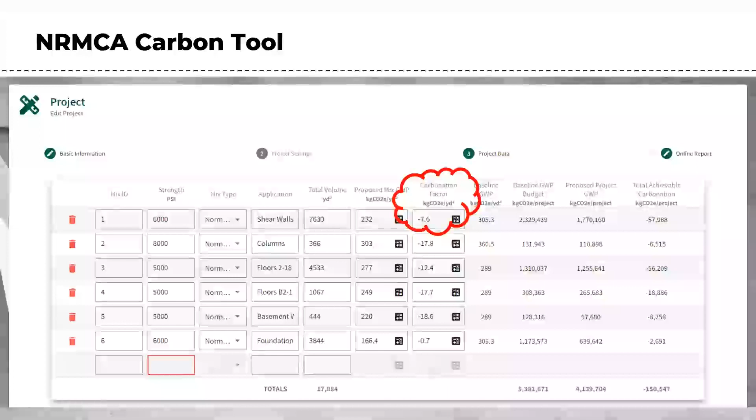You check all those different variables off, and you can get a proposed carbon sequestration for those mixes. Once you go through the whole process, you really just output a nice little report here. But the primary focus of the report is looking at your benchmark project, your baseline in this example, and then what the proposed project is plus carbonation.

And you can see there, it might be a little blurry, but the difference from the baseline, you'll see, we have shear walls, 24% reduction, columns, 16% reduction, lower level floors that are accelerated maybe for high early strength, they only have a 4% reduction.

Now, if you set a goal of, say, 20% reduction for all those floors, you're going to be in a scenario where schedule is going to be impacted, cost is going to be impacted, both. But with this particular example, we had, say, 45% reduction in the foundations, and it kind of offsets some of those areas of maybe more strategic performance, I guess I should say.

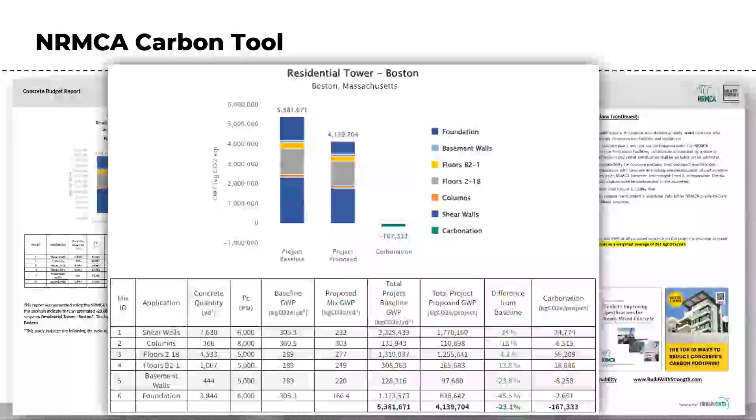And really the aggregate reduction for that project in this example then is 23%. So that's a really good, reasonable target. Once you take that figure, we have our benchmark mixes, we have our proposed mixes, and we saw, okay, a 23% reduction is what we can achieve.

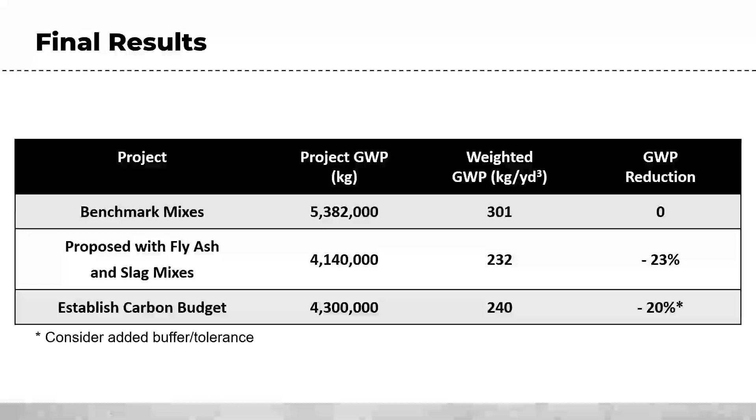Add a little bit of buffer and additional tolerance in there. Let's set in the actual specifications a reduction of 20% as our goal, or a 240 kilograms of CO2 equivalents weighted average. And really, it's as simple as that, putting those figures into your specification. Our spec guide does highlight other modes of verbiage that can go in there to pair with this, to marry with it. But that's really the gist of it for the most part.

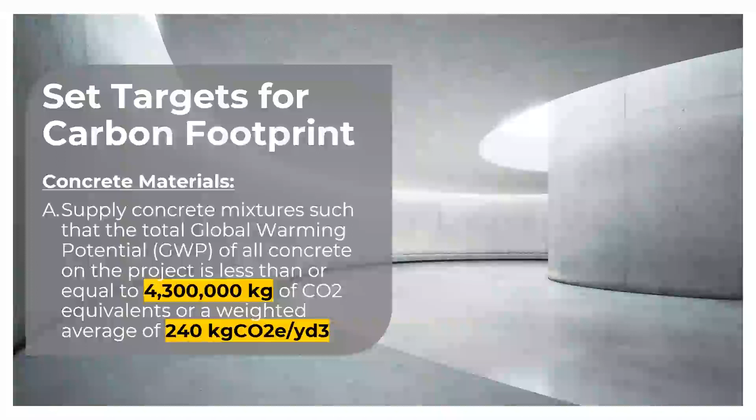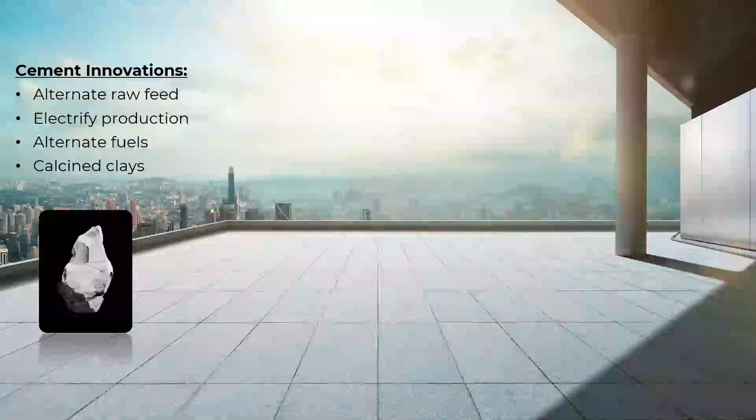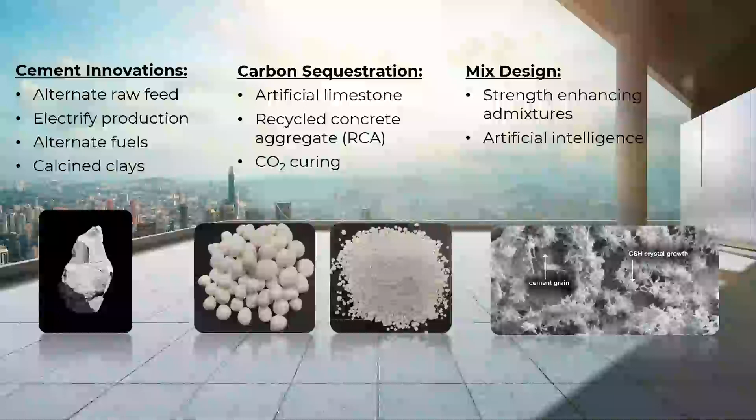So it looks like we're at time. I did want to highlight really quick, our industry is constantly moving towards other innovations. We have cement innovations with alternative raw feeds, electric production, alternative fuels, calcined clays, other carbon sequestration with artificial limestone aggregates, recycled concrete aggregates, CO2 curing, and then mix designs. We also touch on strength enhancing admixtures, more efficient use of the material, and artificial intelligence is another thing that our industry is really getting neck deep in. So a lot of interesting, exciting things out there.